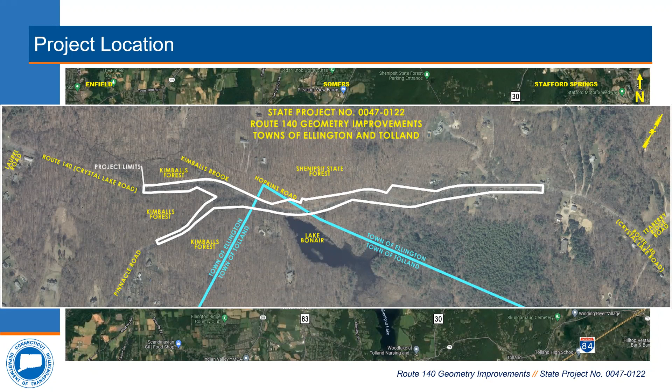Now I'm going to go over the existing conditions of the roadway. This aerial shows Route 140 within the project limits, and also the intersecting local roads of Pinnacle and Hopkins, which are both stop control at the intersection with Route 140. North points towards 1 o'clock on all the aerials, and a camera icon will appear on each slide to show the location and direction of the corresponding images.

If you direct your attention to the left of the screen, the camera icon will pop up at the left, showing the view traveling in the eastbound direction on Route 140. As you can see in the image, Route 140 has many steep roadside embankments that contain vegetation and rock near the edge of road, and this is consistent throughout the project limits.

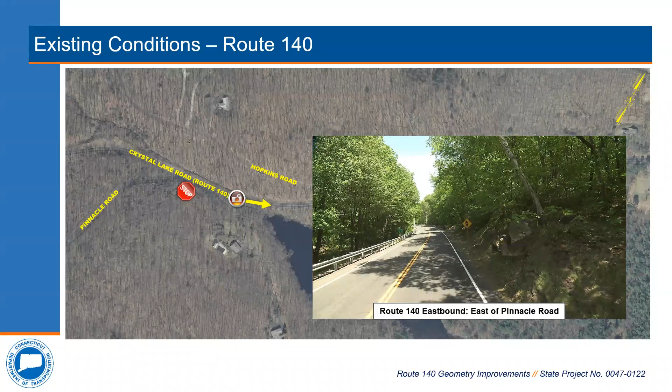Looking further east, just east of Pinnacle Road and looking in the eastbound direction, this is the view of Route 140, again with the steep embankments that contain rock and vegetation right off the edge of road.

Moving further east, just after Hopkins Road, we have the view of the geometry in this area. This is the section of the project with the tight horizontal curves, what we call reverse curves or S curves, which are being realigned as part of the proposed project.

The curves are sharp and change direction with little or no transition length in this area, which allows a small amount of time for a driver exiting one curve to turn the steering wheel and prepare to enter the next. So drivers have to act quickly in order to navigate the three curves.

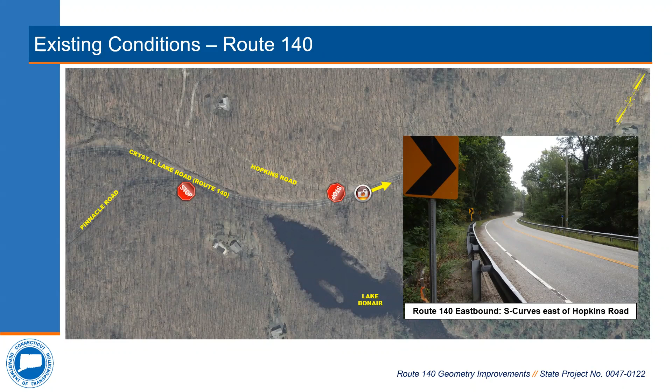This one is showing the large rock slope that's right off the edge of road. The left image shows the spring-summer condition with all the vegetation on the slope further obstructing people's view around the curve, and the right side shows the fall-winter condition, again with poor sight lines, but this time without the vegetation.

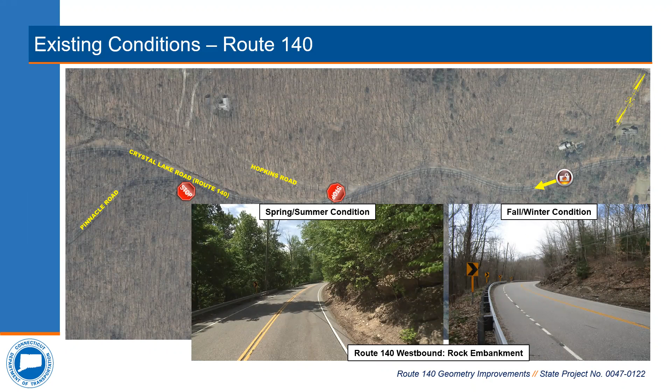And the last image on Route 140 is also looking westbound. This just shows the end of the project limits where we're tying back in.

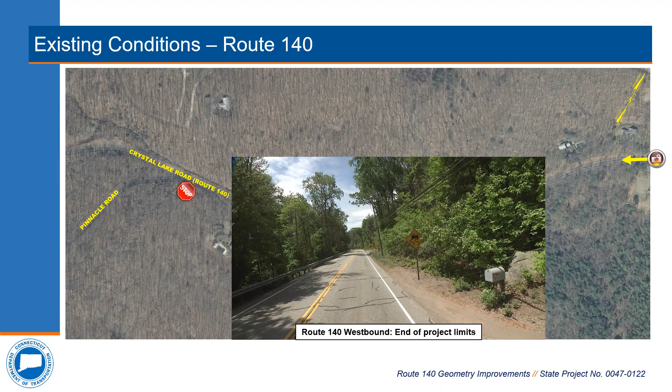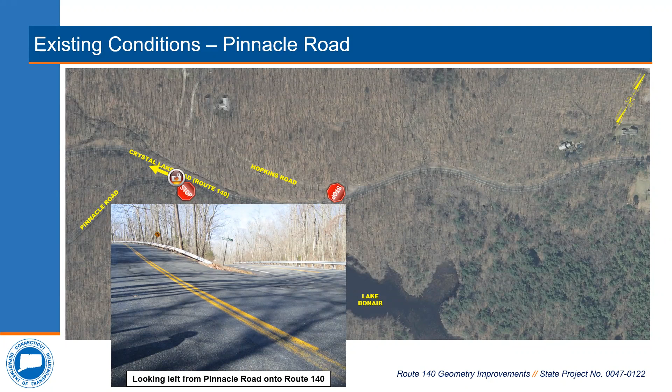And now I'm going to show you the views looking up Hopkins Road from Route 140. So this is the view of Hopkins Road looking up from Route 140. It's also stop controlled at the intersection.

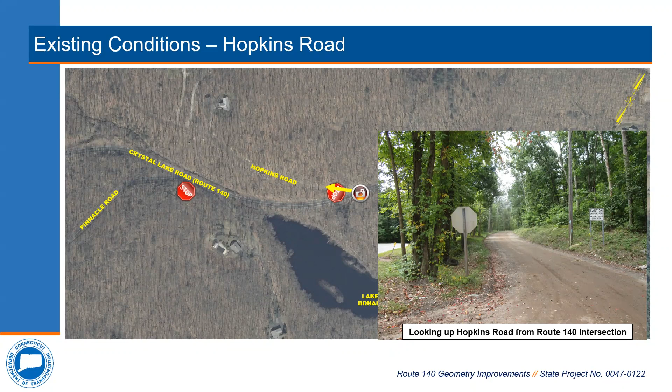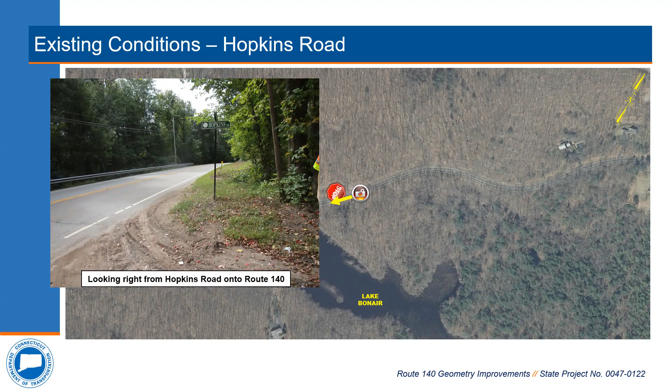And it's an unpaved road. It's very narrow and it has steep slopes and vegetation off the edge of the road as well. And now the view looking right, if you're sitting at the Hopkins Road intersection looking right onto 140. And this is the view looking left onto 140 from Hopkins Road.

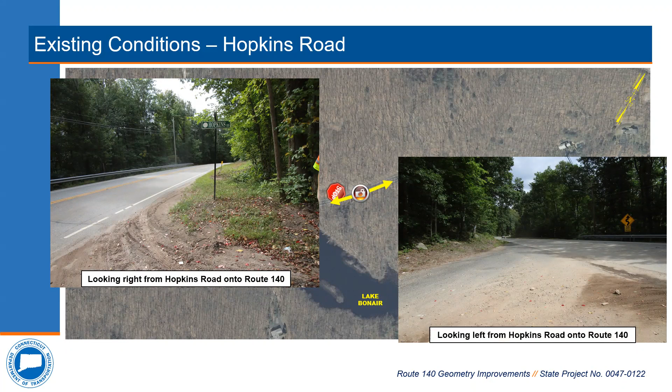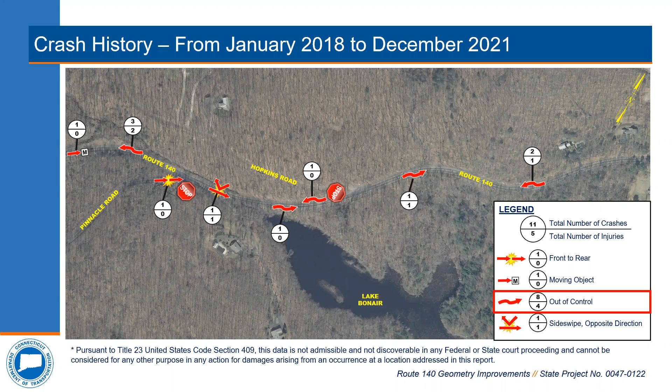There are several factors that influence the design, including steep embankments with rock outcrops, wetlands, and water courses.

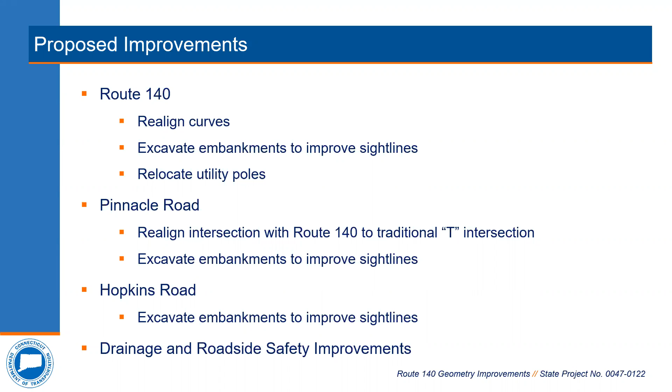So since this view may appear small, the next few slides are going to break the project up into sections showing the larger views of the proposed work.

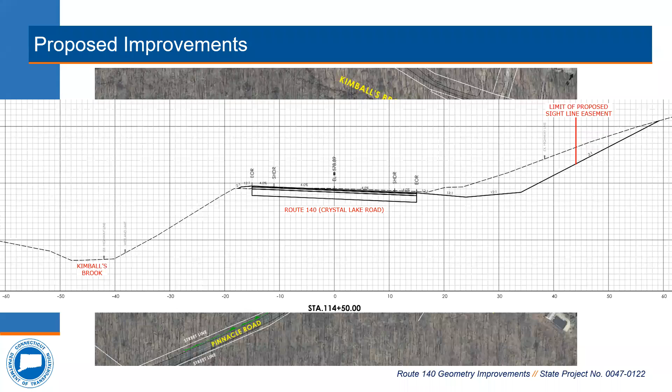In this area, the roadway is not changing alignment, so the alignment is going to follow the existing center of the roadway. It's not changing since Kimball's Brook is restricting the improvements on both sides. And although we're not changing the alignment, we are still correcting the slopes of the roadway to provide a better transition for drivers navigating the curve.

Additionally, slight improvements are being made to the Hopkins Road intersection in this area to better tie it into Route 140 and increase the sightline for drivers looking right out of the intersection.

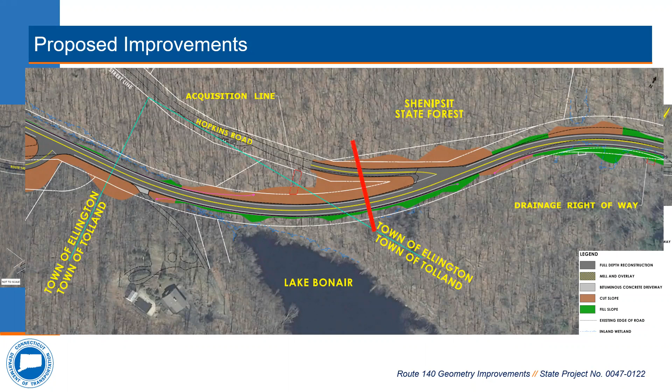Again, like a slice of bread, the red line is going to show us the cross section of the roadway. In this section, all the way to the left, we have the reconstruction of Hopkins Road within our project limits. All the way to the right, we have the reconstruction of Route 140, and in between, we have the embankment excavation to provide better sight lines.

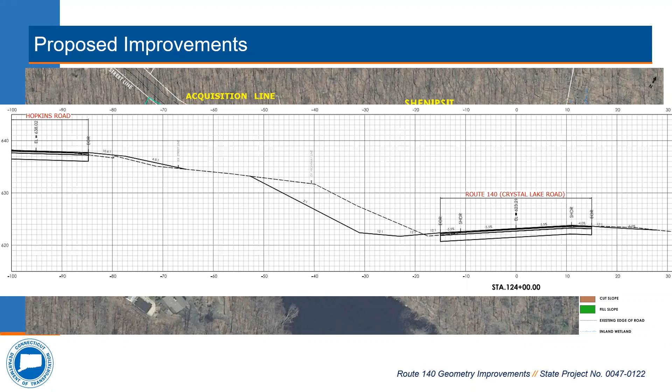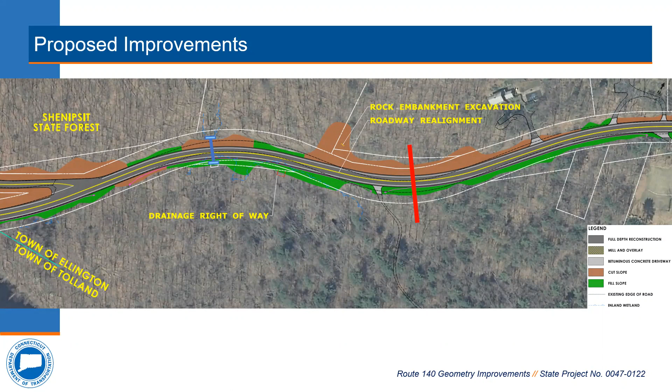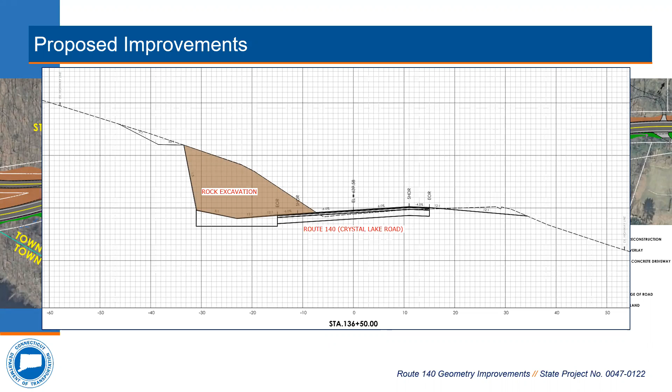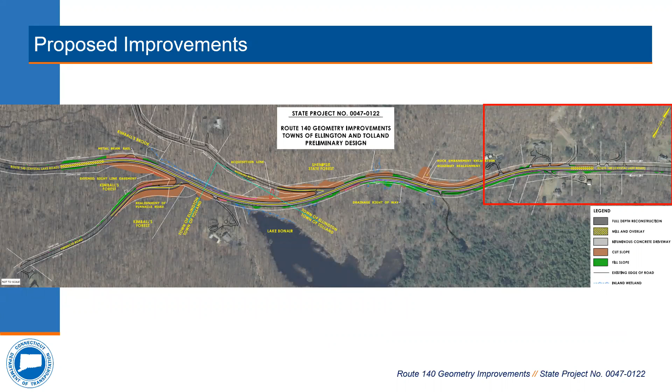This last section is going to show the end of the project limits, where the proposed design ties back into the existing roadway. In this section, the last of the S curves is tying back into the existing roadway. This area is the more residential side of the project, and there are several driveways being reconstructed to the slope limits.

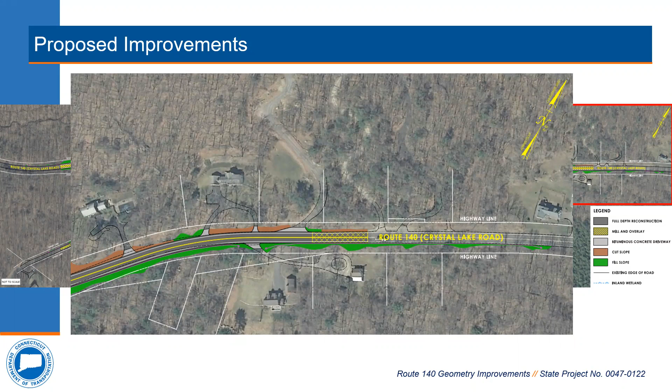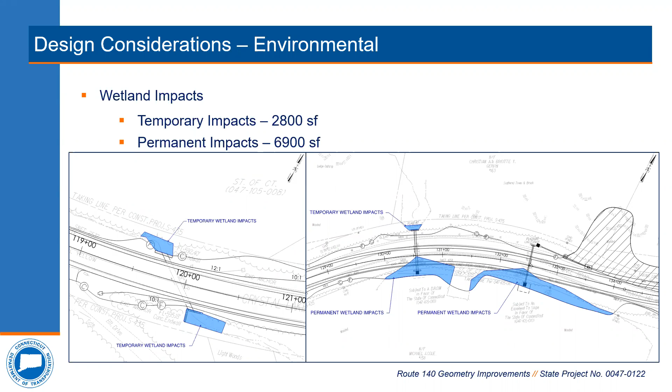Now moving on to design considerations used in the development of this project. One consideration was environmental impacts. The proposed improvements result in impacts to several wetland areas. Temporary impacts are due to replacing drainage structures, and these areas will be restored at the end of construction. Permanent impacts, shown on the right figure in blue to the south of the roadway, are due to the required realignment. Temporary impacts are anticipated at 2,800 square feet, and permanent impacts are anticipated at 6,900 square feet.

Another design consideration is utilities within the project limits. It's anticipated the proposed design will require several utility poles with overhead utilities to be relocated. It's anticipated that 15 poles will be relocated as a result of the earth excavation, the cuts and fills of the roadway, and the roadway realignment, with another 6 poles currently being evaluated for relocation. There are no underground utilities within our project limits.

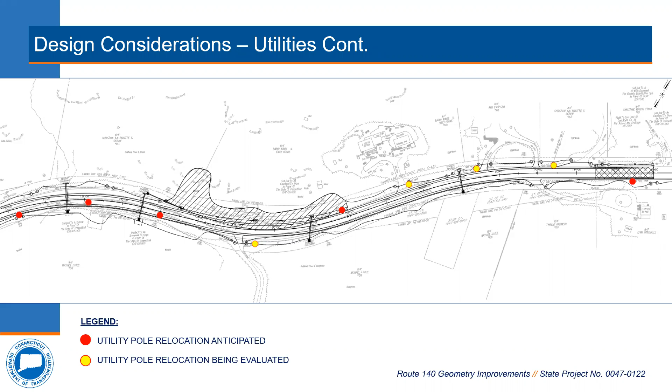Moving on to the rights-of-way consideration, our improvements will require 1 full acquisition for the intersection sight distance improvements looking right from Hopkins Road. I want to note that this is a land-only acquisition.

The project requires a drainage right-of-way to extend a storm drainage pipe under Route 140. 1 defined sightline easement is required to increase intersection sight distance looking left from Pinnacle Road. Several slope easements are required to accommodate the project's improvements. Improvements will also require several rights to grade and installing of sedimentation control systems.

The next few slides will show the impacts to each of the affected properties.

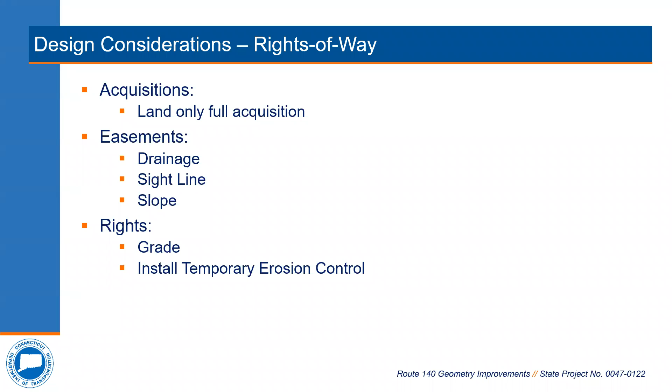Here are the impacts to the several Town of Ellington properties, as well as 23 Bonair Road near the Pinnacle Road area. North is going to point towards 1 o'clock on all the figures. The Town of Ellington has 3 properties surrounding this Pinnacle Road.

The dark red area is a defined sightline easement located to the west of Pinnacle Road, and it's to improve the sightlines looking left out of Pinnacle Road. Other impacts in this area are all slope easements for the safety of the highway.

The impact to Bonair Road is located to the southeast, the bottom right of the screen. It's this property right here. The slope easement on this property is required to cut back the slope containing large rocks sticking out of it.

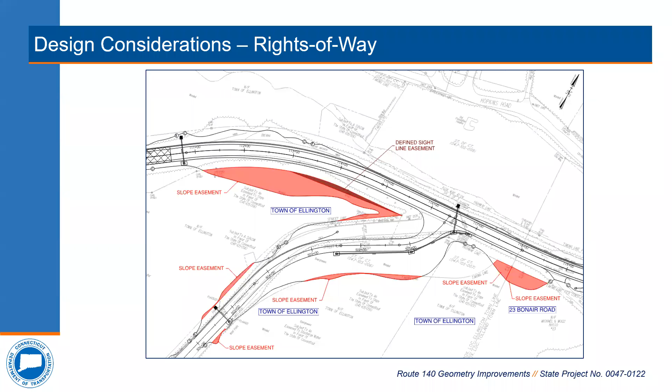This next area is just west of Hopkins Road, and the property borders both Hopkins Road and Route 140. This is the full acquisition due to a slope impacting a significant portion of the small property. I want to note, again, it is only a land acquisition.

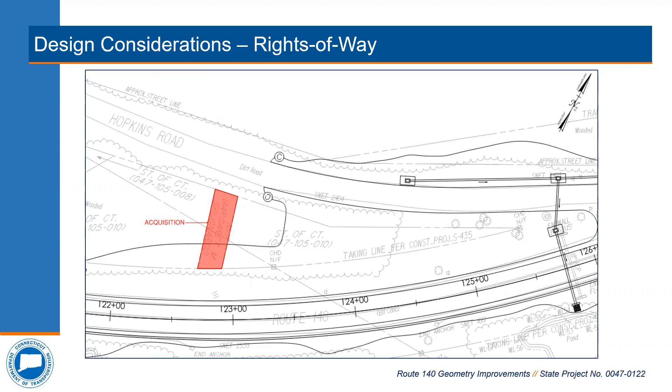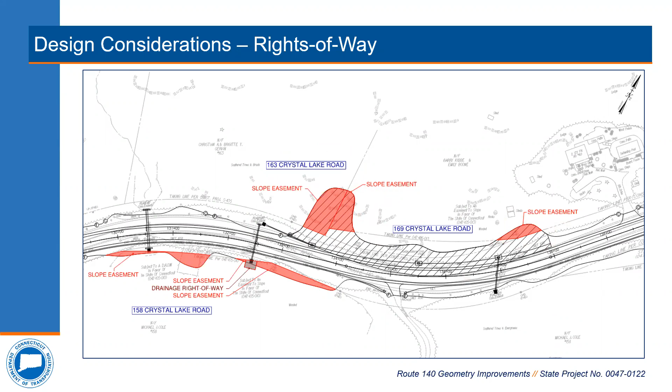So now I'm going to turn it over to Matt Giannakopoulos, who's our right-of-way coordinator, to discuss our right-of-way policy as it relates to the project.

Thanks, Melissa. I'm Matt Giannakopoulos, a project coordinator with the department's Division of Rights of Way. It is our office's responsibility to acquire all the property rights needed for transportation projects. As Melissa just outlined, this project does require the acquisition of property rights. So I'm here tonight to give you a brief overview of our acquisition process.

Before I get into that, I want to elaborate a bit on what we mean by easements. When the department acquires an easement, it's acquiring the right to use private property for a specific purpose. Most of that in this case is sloping, so cutting or filling, or it could be maintaining a sight line, or for drainage. A drainage right of way is a type of drainage easement.

All property rights required will be acquired in accordance with the Connecticut General Statutes, sections 13A-73 and 13A-98E. Whenever there is federal money used in any phase of a project, the department must adhere to what is known as the Uniform Act. So I'll ask Melissa to switch over to the next slide when she gets a chance.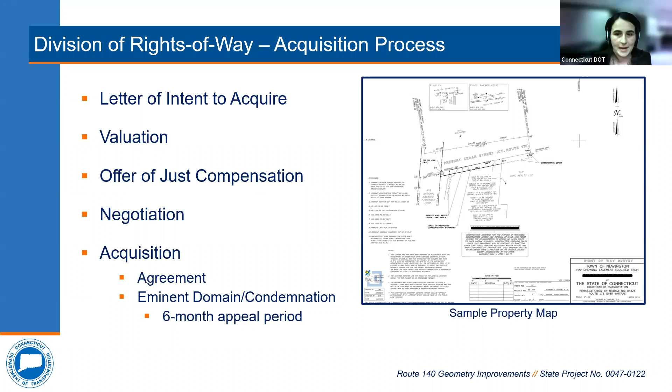Great, thank you Matt. So continuing on with the design considerations, the next design consideration is historical and archaeological resources. The Phase 1 survey was completed in August.

The Phase 1 survey involves a walkover, which is usually a visual evaluation of the site, some background investigations searching state and local archives, and subsurface investigation, taking test pits of the area to determine if further investigation is required to determine if there are any archaeological or historical resources in the area. It was determined that no historic properties were affected as a result of this project.

The next design consideration is construction. It's estimated that this will take 2 construction seasons beginning in 2025, with the construction season starting in April and extending to the end of November. This project is expected to be constructed in stages using a one-way alternating traffic pattern with temporary signals on Route 140.

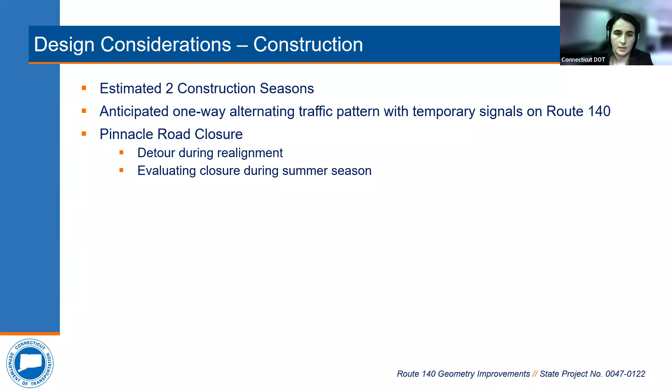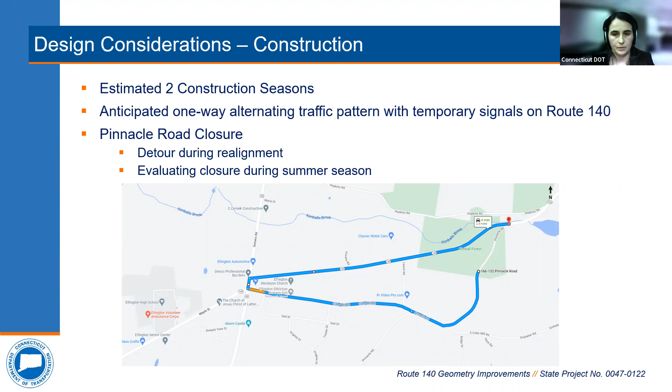Traffic would be detoured to continue on Route 140, turn left onto Route 83, which is Somers Road, turn left onto Cedar Mill Road, and bear left onto Pinnacle Road. It's approximately a 4-minute long detour.

That concludes the presentation portion of this evening. We're now going to be moving on to the question and answer phase of tonight's meeting.